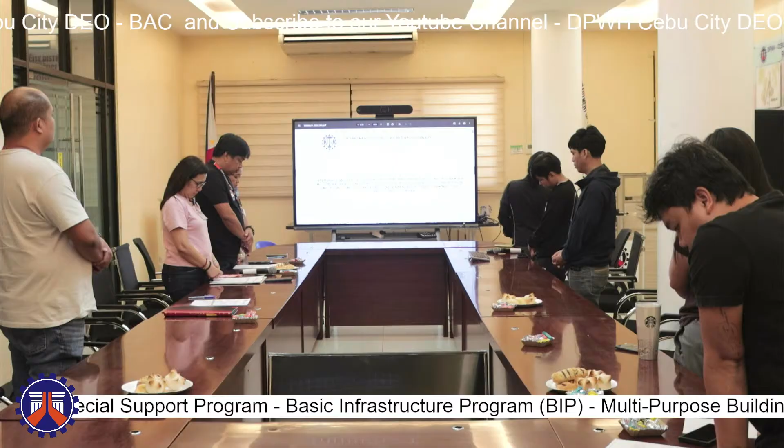Let us put ourselves in the presence of the Lord. Our Heavenly Father, we offer you our thanksgiving. We thank you for everyone gathered here today to walk with you. May we ask for your blessings and guidance so the activities set for this undertaking be successful. We ask you to open our eyes to see the wonderful things from this activity, open our ears so we may retain the invaluable knowledge, open our minds for us to think wisely, and fill us with understanding, cooperation, and peace in fulfilling our responsibilities. Open our hearts so we may receive your everlasting love, and open our spirit so we may know that you are with us all throughout the day. We ask all this in the name of Jesus Christ. Amen.

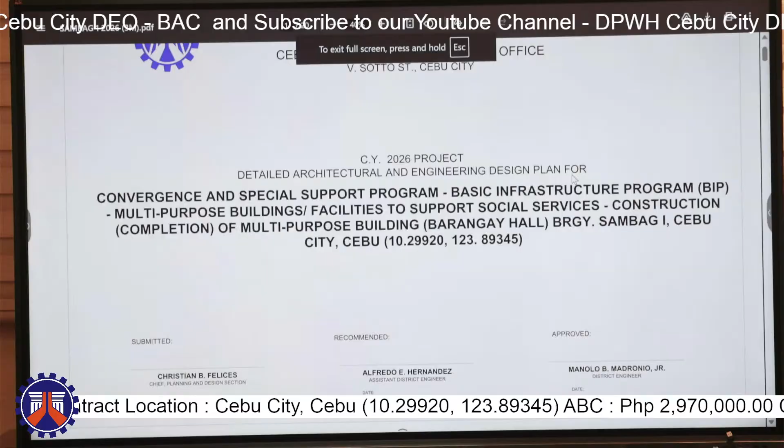The approved budget for the contract is 2,970,000. Here is the site development plan and vicinity map, its perspective and its geotagged photo, and the summary of quantities.

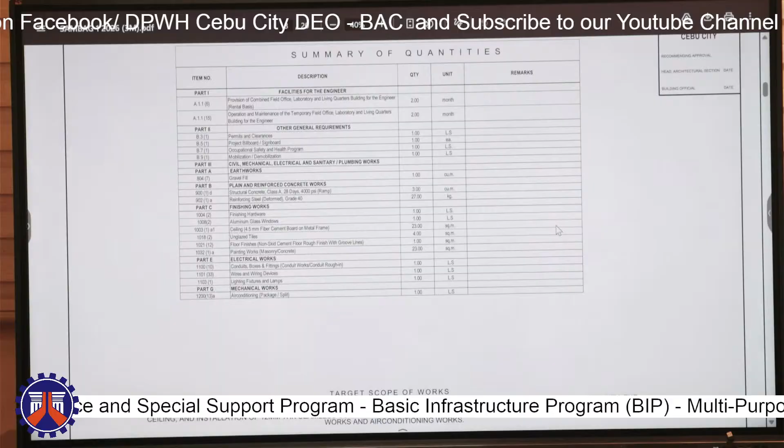The scope includes earthworks, plain and reinforced concrete works for ramp construction, finishing works at the roof deck, ceiling installation at the third floor, floor finishes for the ramp, and installation of electrical and air conditioning units. Here is the ground floor plan.

Here is the installation of the ramp with floor finishes — non-skid cement floor finish with groove lines and unglazed tiles. This is the second floor plan, and the third floor plan shows the removal and replacement of ceiling and also electrical works.

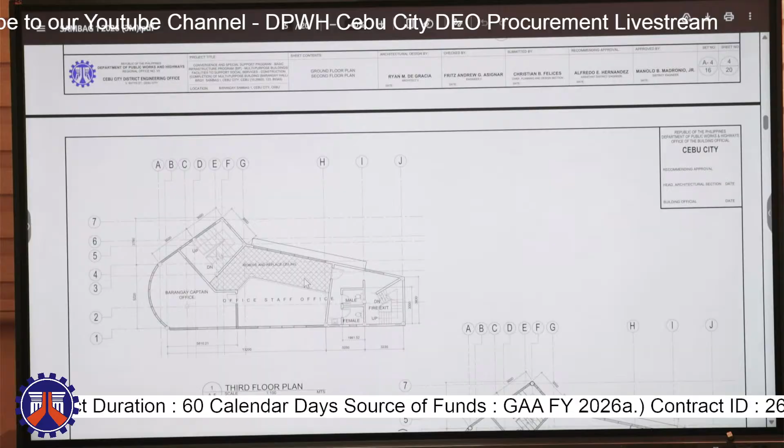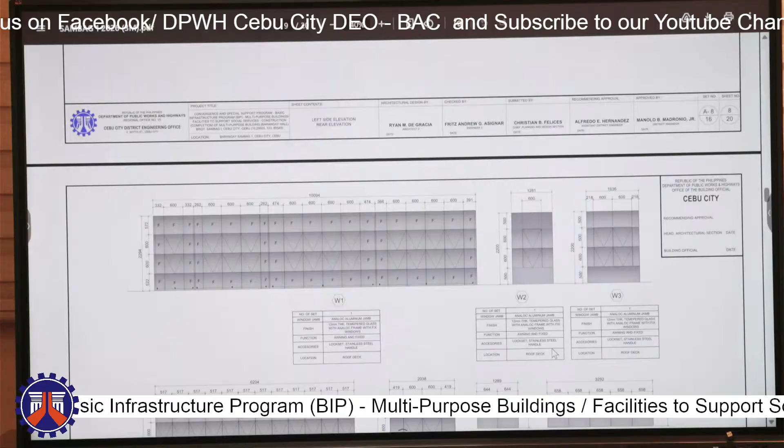In the roof deck plan, we close all the area with curtain walls and 12mm thick awning windows. Here are the different schedules, the detailed ramp plan, and ceiling plan. And that's all.

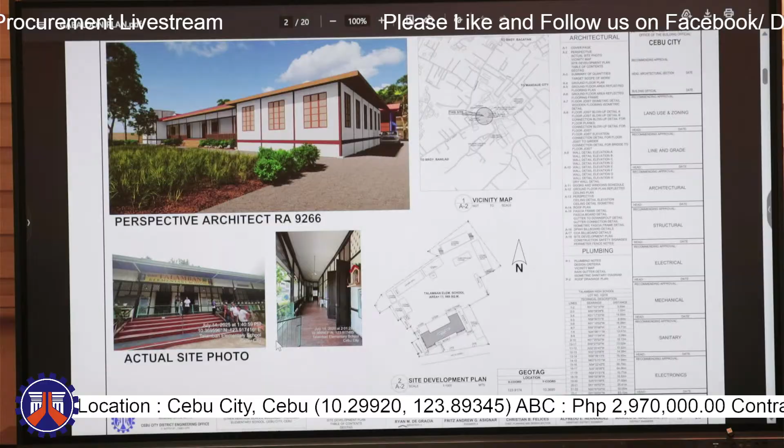Here is its perspective, vicinity map, and site development plan with geotags, and the summary of quantities. This project aims to restore and conserve the Talamban Elementary School Gabaldon building in Cebu City.

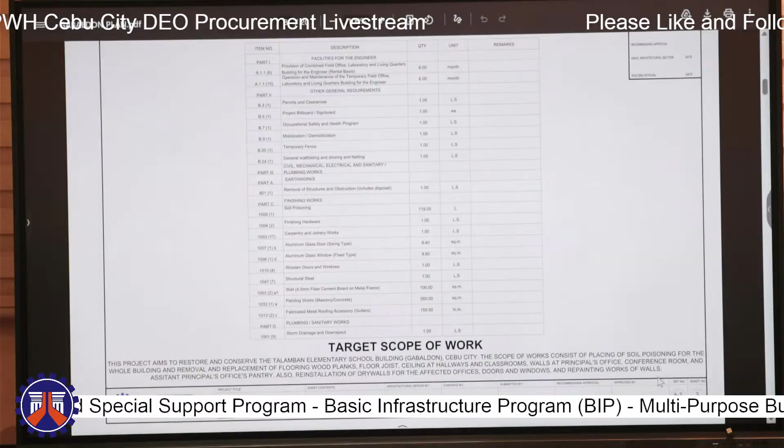The scope of work consists of placing soil poisoning for the whole building, and the removal and replacement of flooring, wood planks, floor joists, ceiling at hallways and classrooms, walls at the principal's office, conference room, assistant principal's office, and pantry area. Also reinstallation of drywalls for the affected offices, doors, and windows, and repainting of woods and painting works of walls.

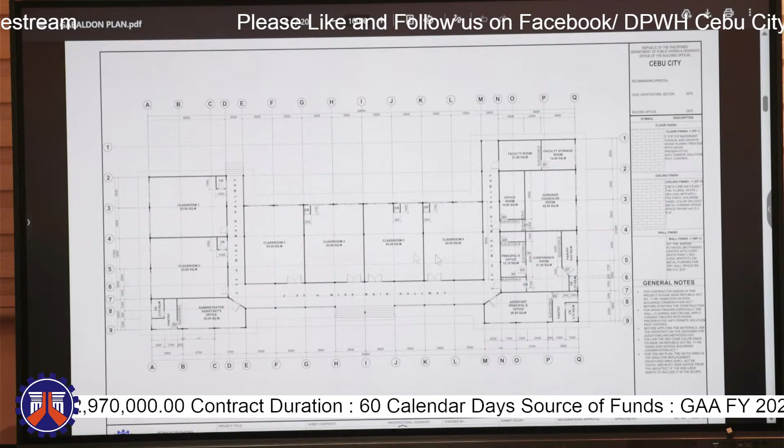Here is the ground floor plan. All areas will be placed with soil poisoning, and each floor joist and flooring plank is removed and replaced. Here is the ceiling flooring plan.

The detailed floor joist and flooring details, blow up detail of floor joist and connection of wooden floor planks.

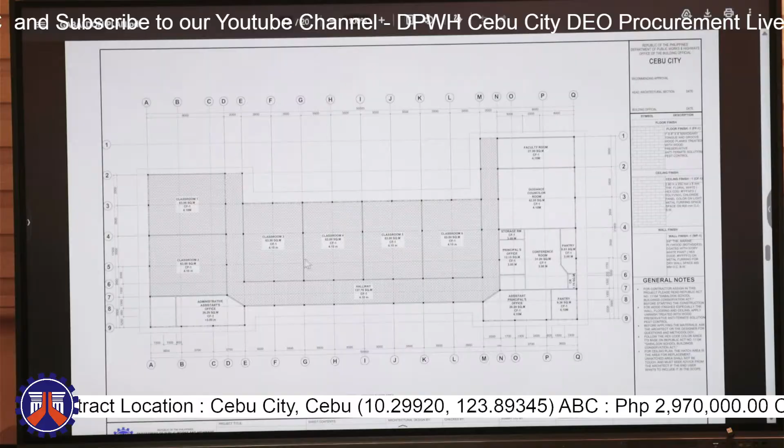Removal of dry walls at the affected offices, schedule of doors and windows, and removal of all 6 classrooms and hallway ceiling.

Here is the ceiling detail.

Removal of gutter and reinstallation of downspout. Removal and replacement of gutter and installation of downspouts. Fascia framing detail and gutter connection detail and downspout.

Isometric sanitary diagram of all downspouts. And that's all.

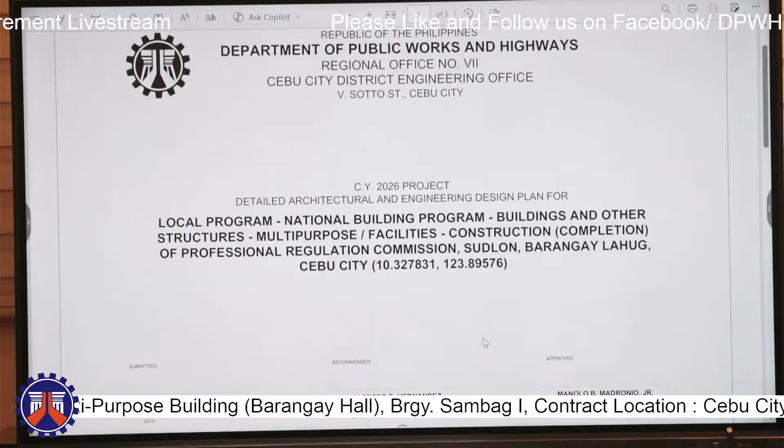For the next project, contract ID is 26HH0021 with contract name Local Program, National Building Program, Buildings and Other Structures, Multipurpose Facilities, construction completion of Professional Regulation Commission, Sudlon.

Barangay Lahug, Cebu City, with the approved budget contract of 29,400,000 and with its contract duration of 240 calendar days. Source of fund is GAA FY 2026.

So this is the perspective view, the vicinity map, and the site development plan.

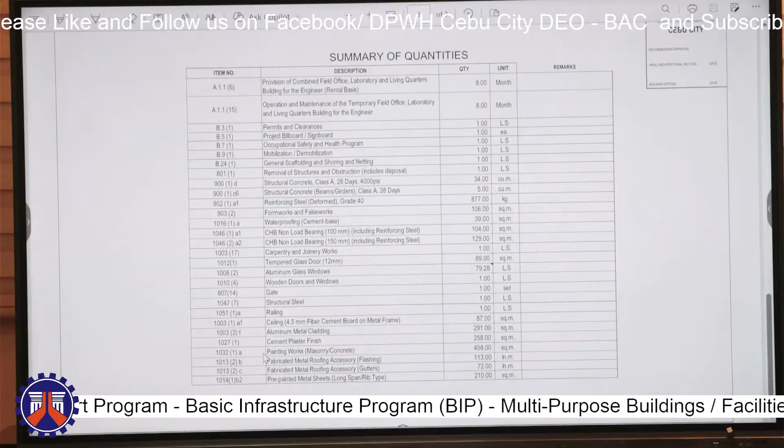For the summary of quantities, there will be structural concrete for beams and girders for the mezzanine area.

Waterproofing also, and installation of CHB non-load bearing, carpentry works, tempered glass doors and windows, and wooden doors.

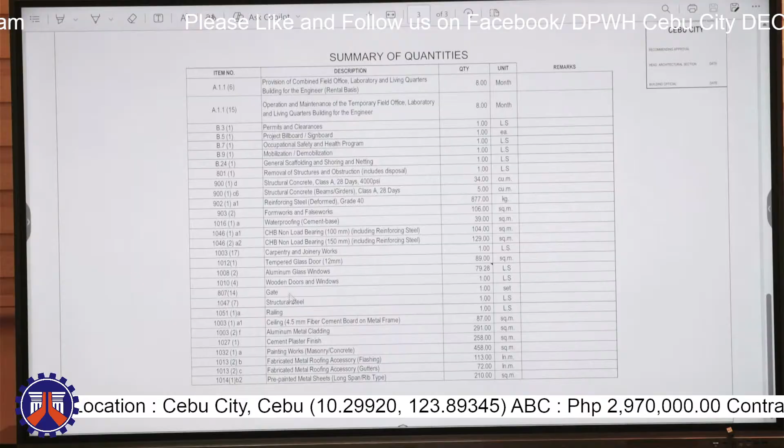As well, installation of wooden doors, and then installation of gate, the perimeter side sa tubangan, and then structural steel, railings at the ramp.

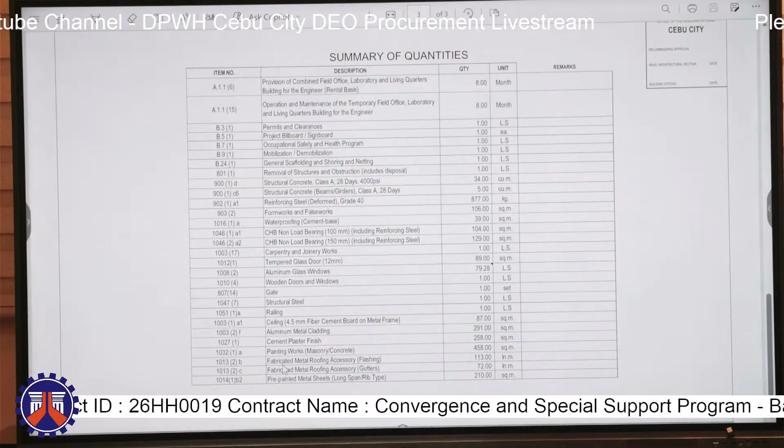Installation of ceiling, installation of aluminum metal cladding, cement plaster finish, and painting works for masonry, and then removal and replacement of metal roofing accessories, flashing, gutters, and rib type metal sheet, long span.

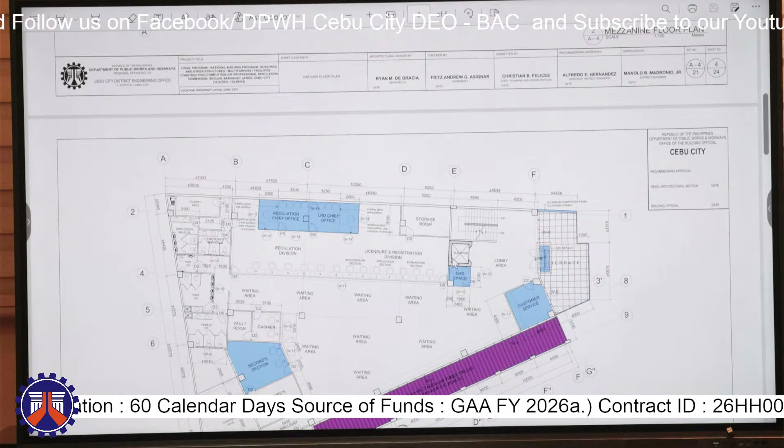The second floor, the tube trellis will be installed in this side, and then extension of the LRD chief office.

So the existing glass wall partition will be extended in this part, and then there will be a new additional glass wall partition, and at the records section as well, window and doors.

Installation, and the GAD office, window and doors installation, and the customer service room as well.

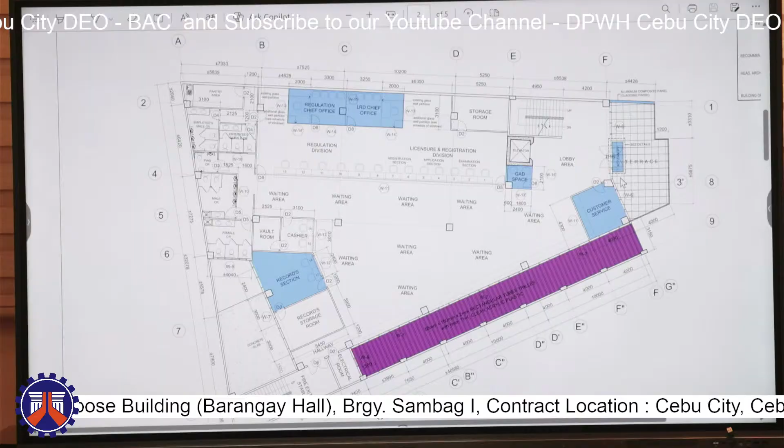For the canopy, there will be an installation of ACP canopy and this side of the building as well.

Installation of aluminum composite panel or cladding finish at the terrace.

So the same at the third floor, the cladding finish extends to the third floor.

And then so for fourth floor, steel stairs will be installed going to the roof deck.

Trellis again with acrylic roofing will be installed in this area at the back.

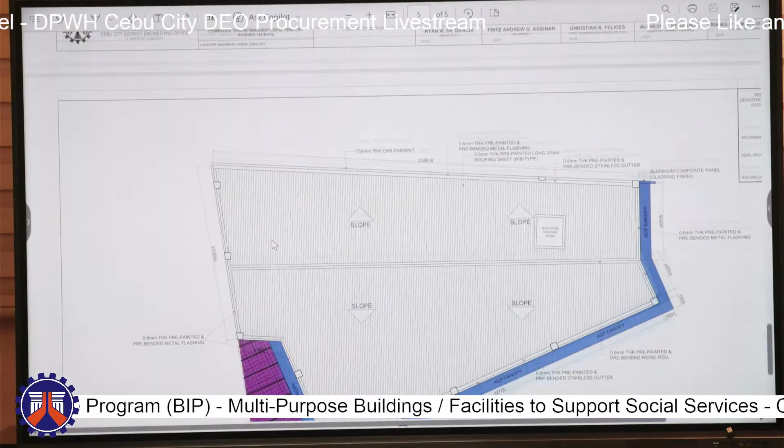So this is the roof plan. Canopy will be installed with a cladding finish on this side, rear, left, and front.

And there will be removal and replacement of gutters and flashing and long span roofing sheet rib type as well.

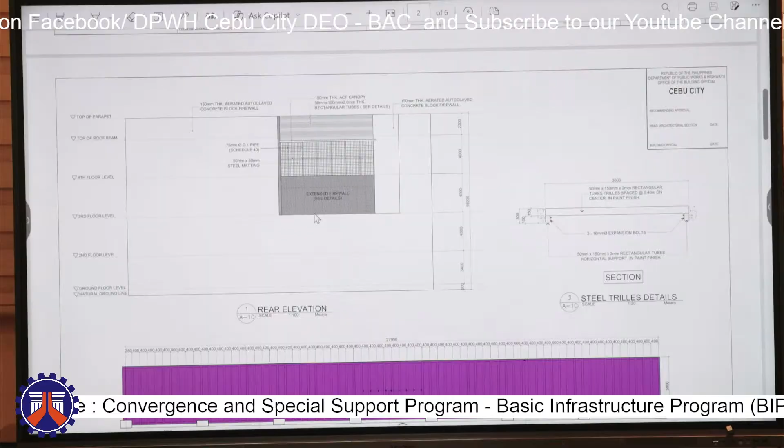And then the extended firewall at the rear elevation, at the rear side. So, extend by 4 meters.

And then this is the detail of the steel trellis.

So the extension of the wall parapet, roof beam.

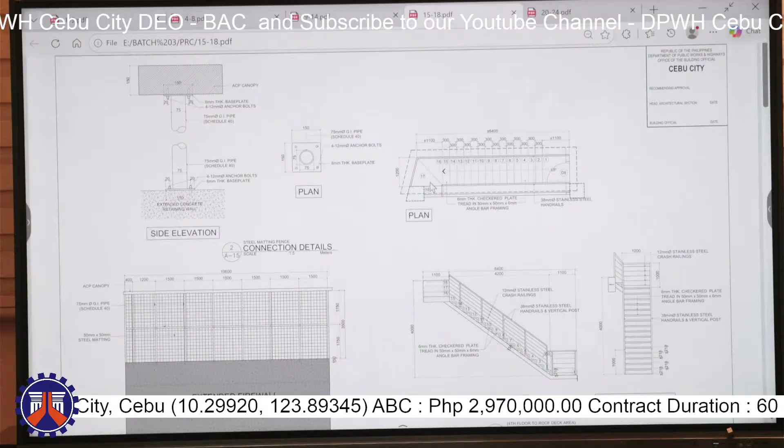So the steel staircase at the fourth floor to roof deck details.

So this is the structural details of that parapet extension. Existing from the third floor to fourth floor extension. That's all for PRC.

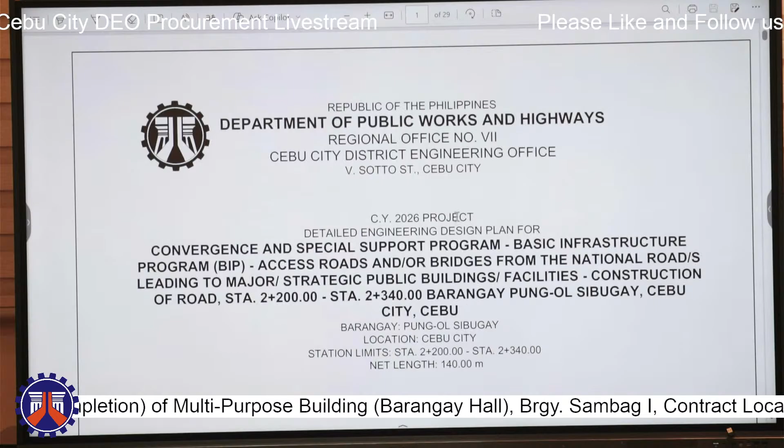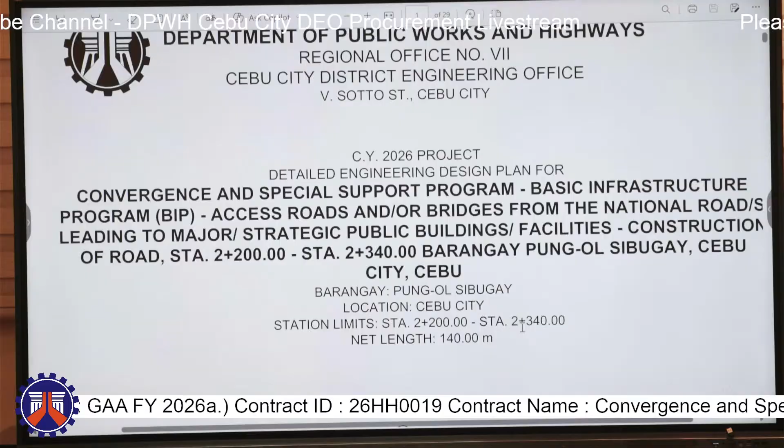For the next project with the contract ID 26HH0022, Convergence and Special Support Program, Basic Infrastructure Program, BIP, access roads and or bridges from the national roads, leading to major strategic public buildings facilities, construction of road, station 2,200 to 2,340, Barangay Pung-ol Sibugay, Cebu City, Cebu. Its station limits are from station 2,200 to 2,340, having a net length of 140 meters.

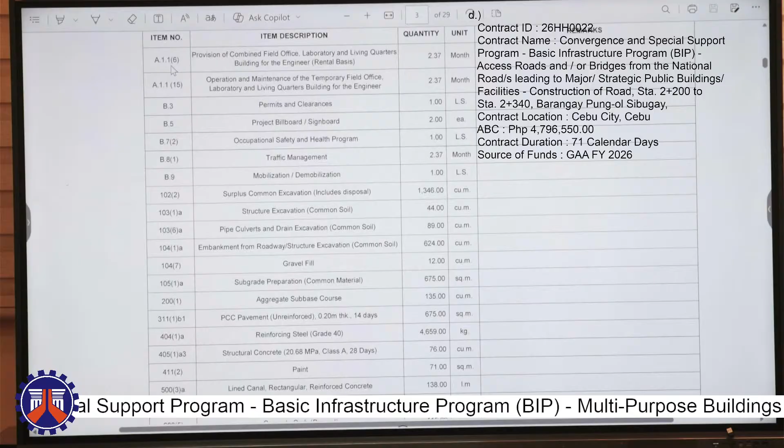For the summary of quantities, we have the usual quantities, and then we have surplus common excavation, structure excavation, pipe culverts and drain excavation, embankment excavation, gravel fill, subgrade preparation, aggregate subbase course, PCCP 14 days 200 thick, and reinforcing steel and structural concrete, paint, lined canal, stone masonry, and concrete curb precast.

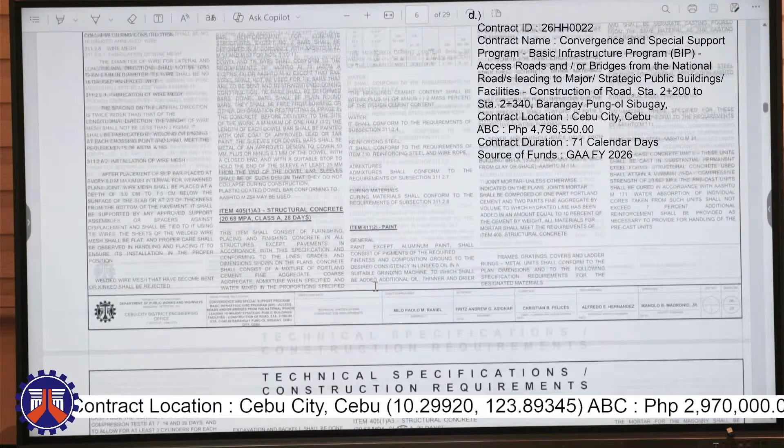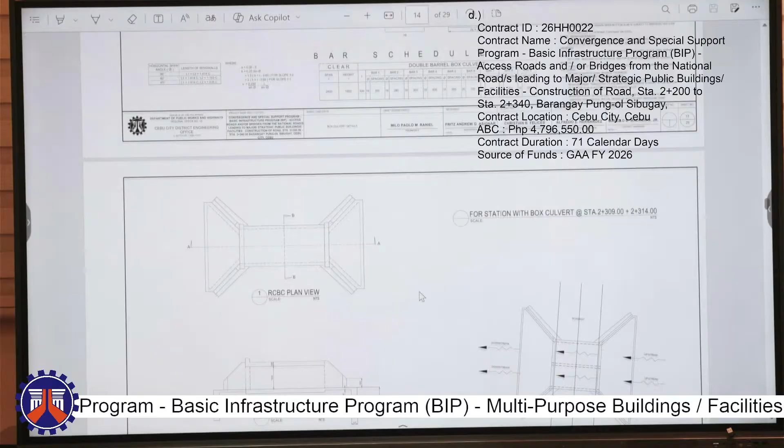And then here is the schedule of structures, and then the details for the stone masonry, the typical line canal, and then the sections for the project. That's all for this project.

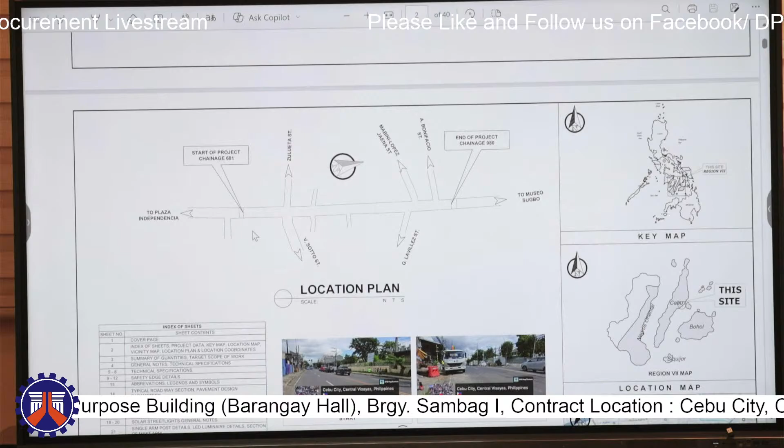Our project is located near COA Regional Office along MJ Cuenco Avenue. Our start here is after the Tabacalera Bridge going to Tejero Bridge.

This is sample photos, site photos for start and the end station. We have our coordinates, start and end also. Then our vicinity map here. You can clearly see the project.

Next, our summary of quantities. We have, for our main scope of work, removal of ACP since this is asphalt overlay. We also have removal of structures for the sidewalk and removal of curb and gutter.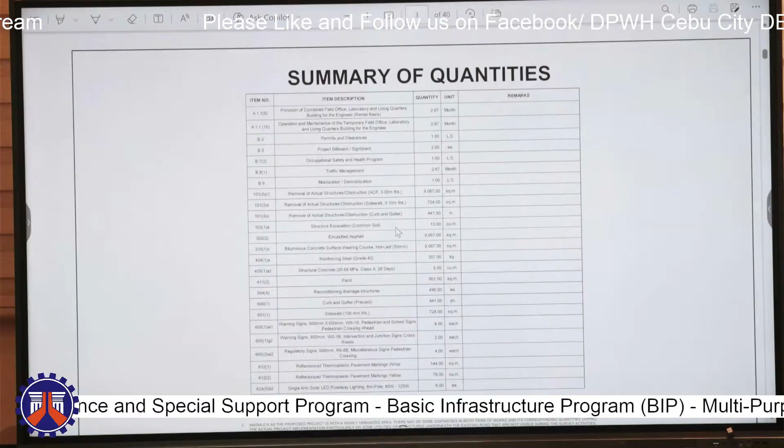For the structure excavation, this is for the solar street lights. Emulsified asphalt and bituminous concrete surface wearing course hot laid is for our asphalt overlay. Reinforcing steel grade 40 and structural concrete is also for the pedestal of our solar street lights.

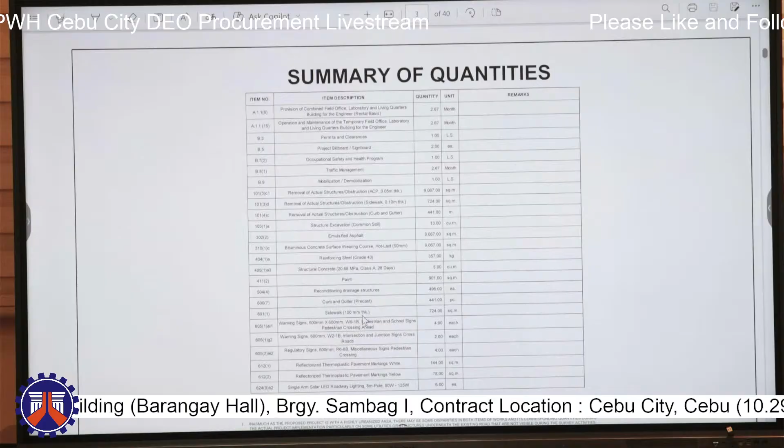Paint is for the concrete curb and sidewalk. Then we also have reconditioning of drainage structure. Then concrete curb precast since we have to replace the existing and also the sidewalk. Then we also have our warning signs.

This one is for a pedestrian crossing ahead. Next is the intersection and junction sign. Then next one, the first one is the warning sign. This one is the regulatory sign, pedestrian crossing.

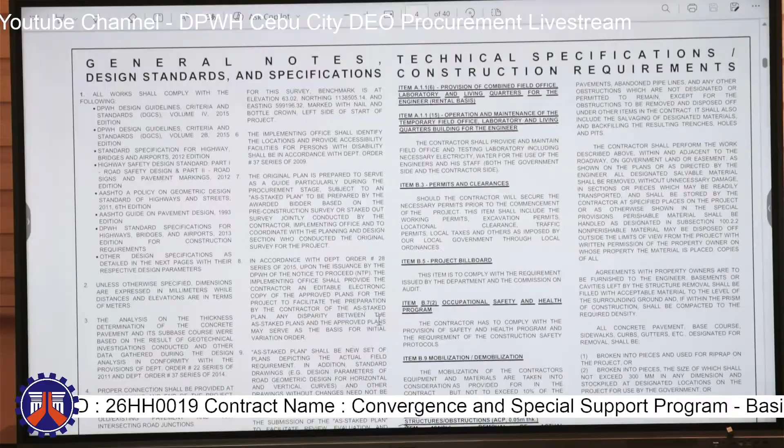Then we also have thermoplastic pavement markings, white and yellow. And also the last one, we have our solar street lights. Here we have our general notes and technical specifications of the items involved in this project for your reference.

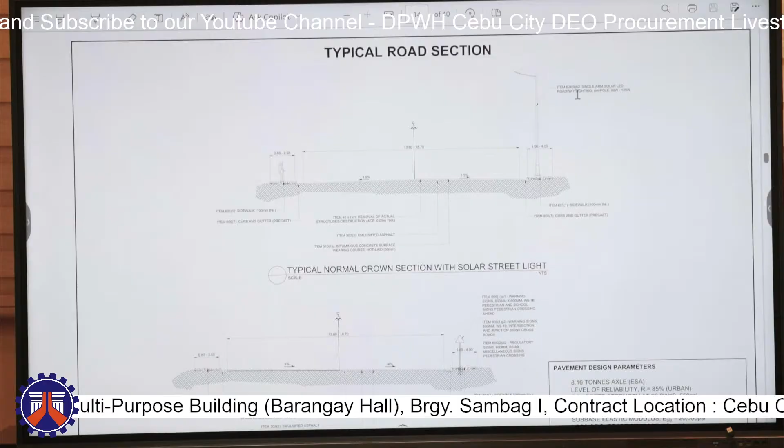Here we have our main road. Then we have our sidewalk here, both sides. Then we have our solar street lights at the right side. Then we also have our typical super elevated section with road sign, this one.

And then the next pages are typical pavement markings. Then we have our pavement marking plan here. Start of our project, the Tabacalera Bridge, going to Tejero Bridge. This one is junction of Bisoto.

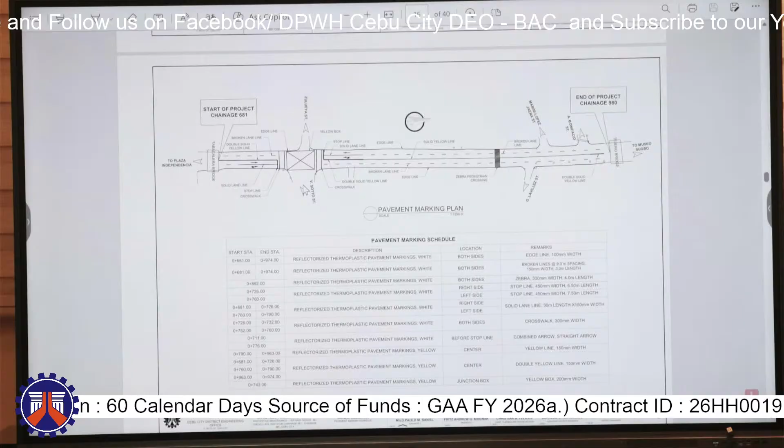The layout of our solar street lights. We have a spacing of 25 meters and staggered placement.

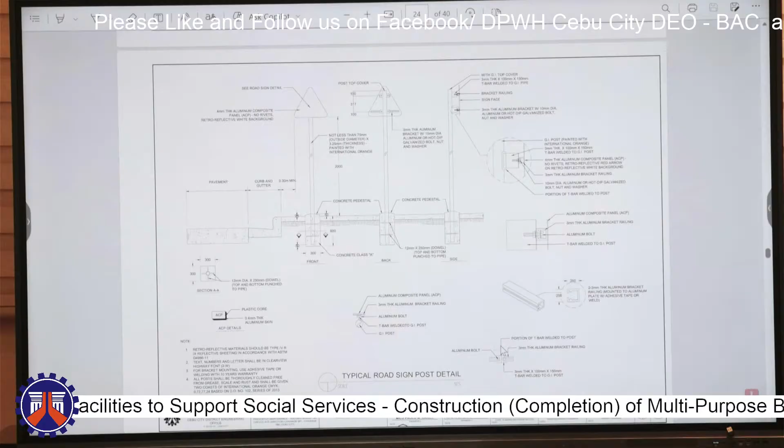Next is the typical road sign detail, this one. Then our road sign detail with the corresponding chainage. This one for our schedule of structures. Next is the super elevation detail.

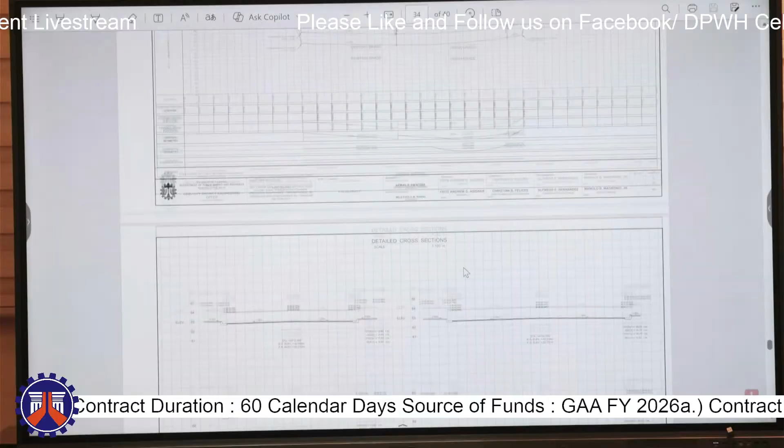Then we also have our billboard design, this one, our new billboard design. Then the plan profile for this project, then the detailed cross section, and the last one is our detailed quantity calculations. That's all for this project.

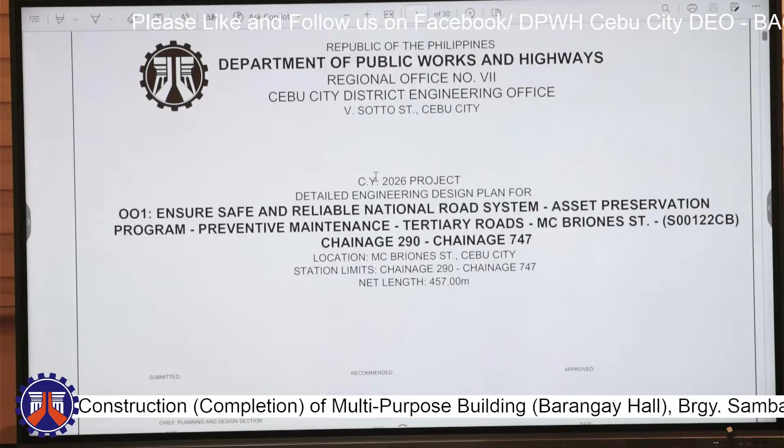So our next project with the contract ID of 26HH0024, with the project name: Ensure Safe and Reliable National Road System Asset Preservation Program, Preventive Maintenance, Tertiary Roads, MC Briones Street, Section ID 122CB, Chainage 290 to Chainage 747, Cebu City.

Contract location: Cebu City. Description: roads construction, asphalt, with approved budget for the contract of 34,114,780 pesos only, and contract duration of 88 calendar days. Source of fund: GAA FY 2026. We have a net length of 457 meters.

So this is the location of the project, near the City Hall. Then for the summary of quantities, we have removal of asphalt, ACP.

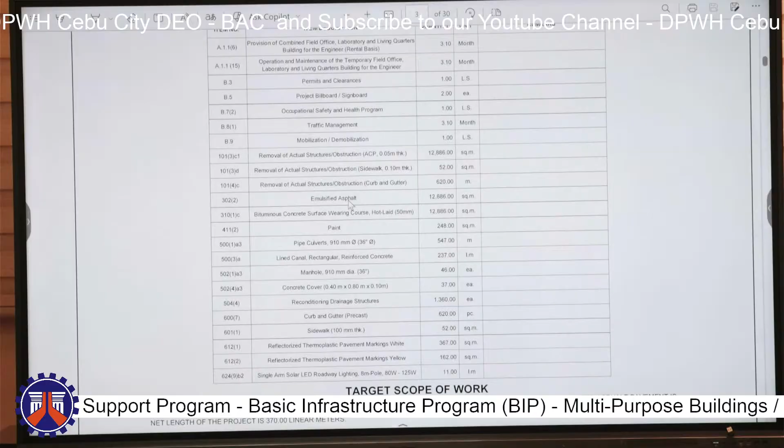0.05 meters thick, removal of actual structures obstruction sidewalk 0.10 meters thick, removal of curb and gutter. So for the asphalt, we have emulsified asphalt, bituminous concrete surface wearing course hot laid 50 mm, paint, and for the drainage structures, we have pipe culverts, lined canal, manhole, concrete cover.

We also have reconditioning of drainage structures. For the replacement, we have curb and gutter, sidewalk, and thermoplastic pavement markings white and yellow. Lastly, we have single arm solar LED roadway lighting, 8-meter pole, 80 watts to 125 watts.

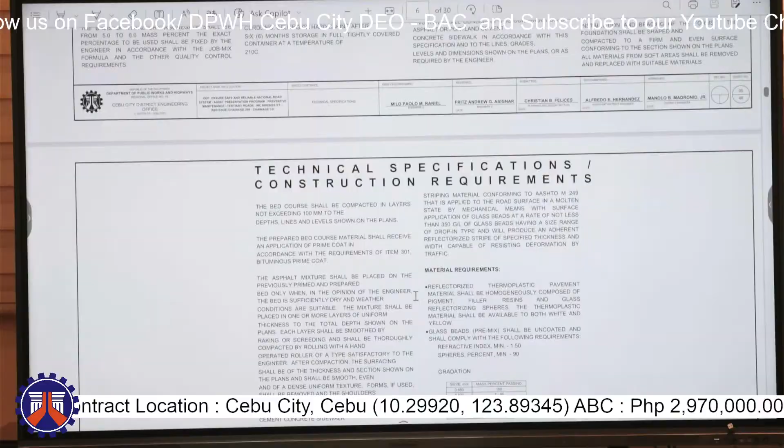Good afternoon. I'm about to discuss the project with the contract ID of 26HH0025, which is the Convergence and Special Support Programs, Sustainable Infrastructure Projects, Alleviating Gaps (SIPAG), access roads and or bridges

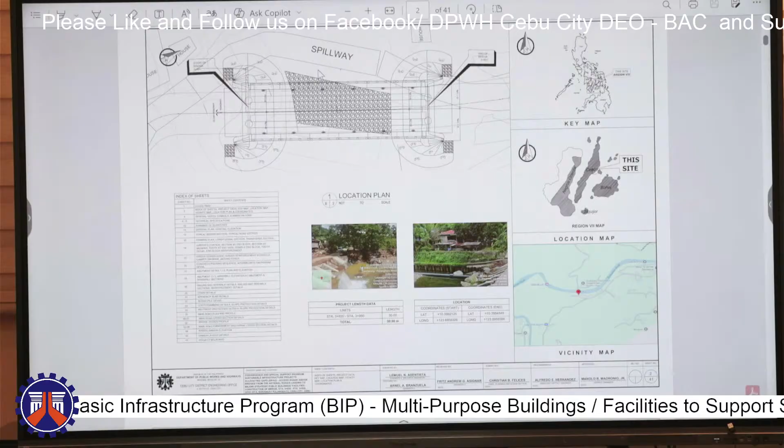The Bridge of Dita is located beside the spillway of Barangay Pulangbato. It traverses to Barangay Sirao. From the Pulangbato side, it diverges from the road to the spillway, and converges to the road after the spillway going to Sirao side.

So here is the general notes and the specifications. Here is the general plan and general elevation with the item number applications wherein stated.

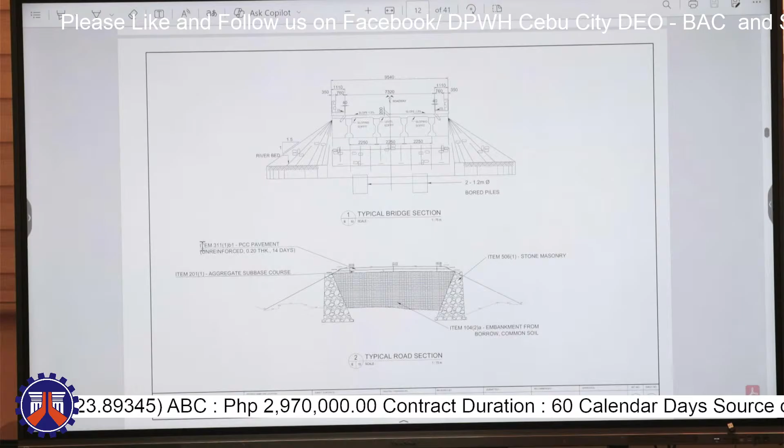Here we have the typical bridge section, the typical road sections, where the application of PCCP and then stone masonry, embankment, and aggregate sub-base course are also stated. We have the framing plan and also the sections, the longitudinal plan also.

It is a pre-stressed concrete girder kind of bridge deck with the length of 30 meters and the width of 9.54 meters. Here we have the girder design guide along with its strength for jacking force.

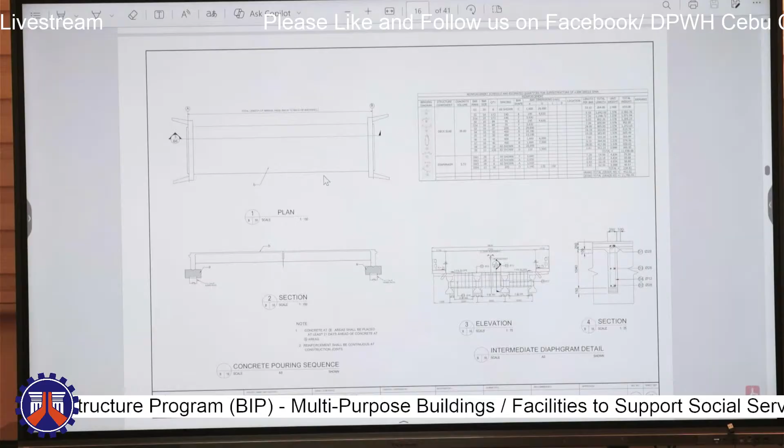We also have the plan section and the details also for the quantity of this superstructure. We have also for the abutment design and details sections.

Also for the wing walls and other designs of the abutment with the abutment quantity takeoff. Here we have the sidewalk elevation, plans, and sections, with also for its estimate.

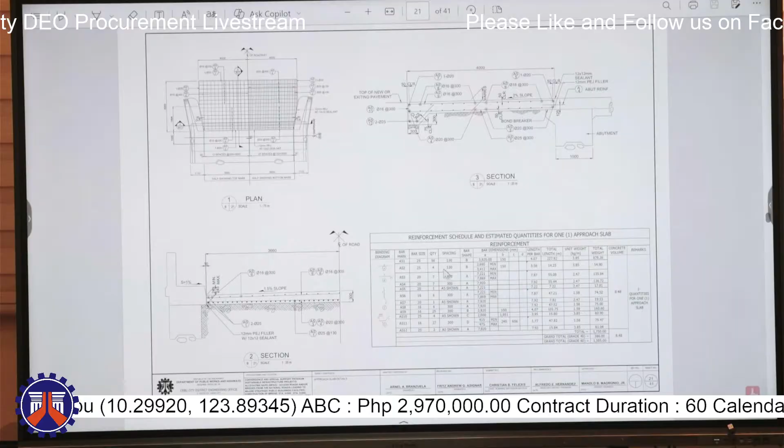Here we have the sidewalk detail and the abutment plan and sections with its quantity. Here we have the bored pile details.

Here we have also the typical detail for coffer dam and the reinforced concrete with slope protection and with the sheet pile detail.

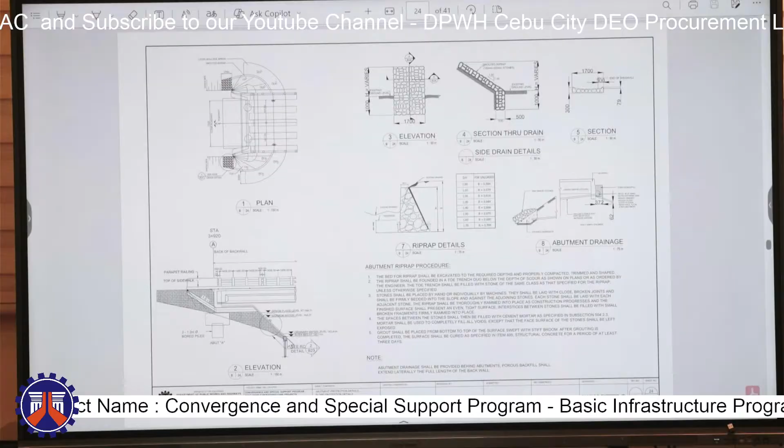Here we have the abutment details with the riprap procedure notes stated also with the proper elevation and placing of the reinforced concrete.

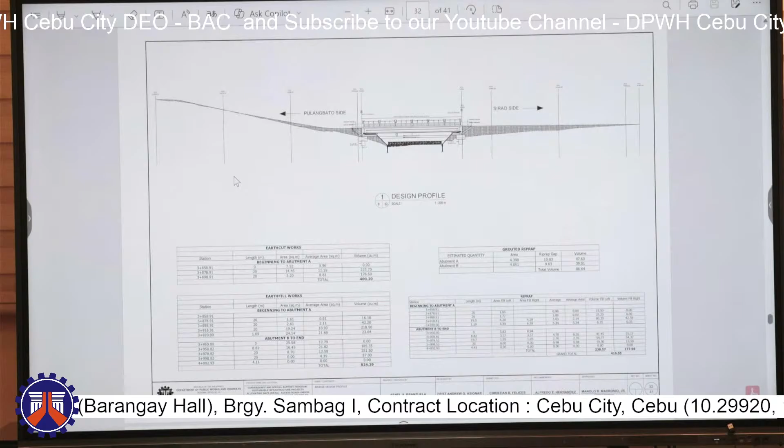Also here we have the design profile for the embankment where the PCCP is going to be placed also beforehand. We have also here the quantities that has been calculated for the embankment and the stone masonry that is to be applied.

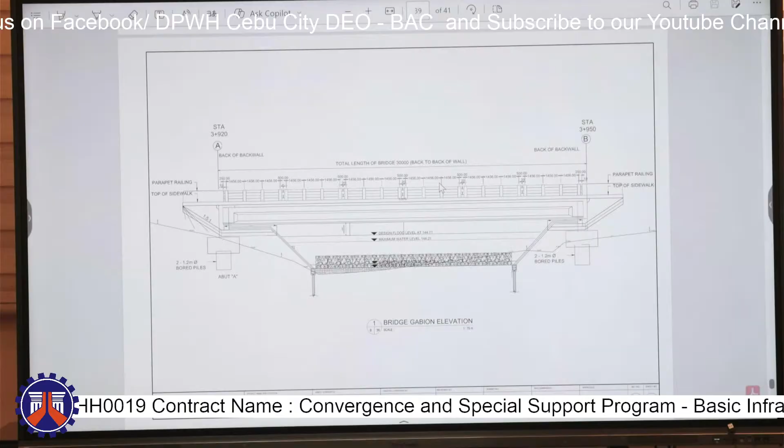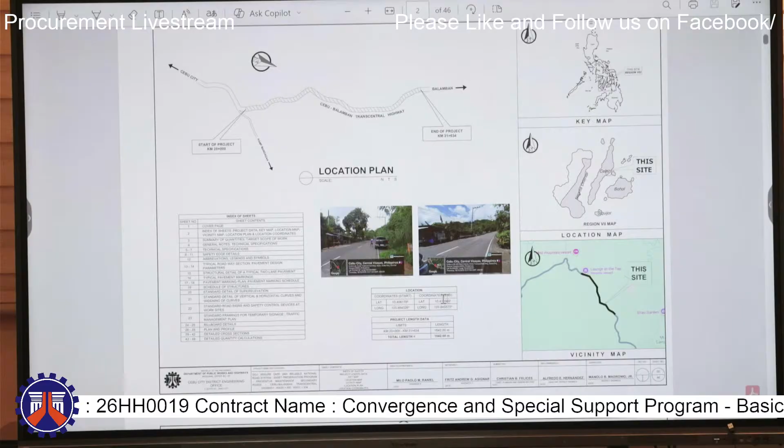Here we have our station limits. Starts from kilometer 20 to kilometer 21 plus 673 with a net length of 1,642 meters. Our location plan, this one starts from kilometer 20. This project is along Cebu Balamban Transcentral Highway. We have our site photos, start and end, our coordinates for the start and end also, and our vicinity map here.

Next are summary of quantities. For our major scope of works, we have removal of structures, ACP, since this is asphalt overlay. Surplus common excavation is for the shouldering. We have some parts of the road that need shouldering. This one, subgrade preparation, aggregate sub-base course, emulsified asphalt and bituminous concrete for the asphalt overlay.

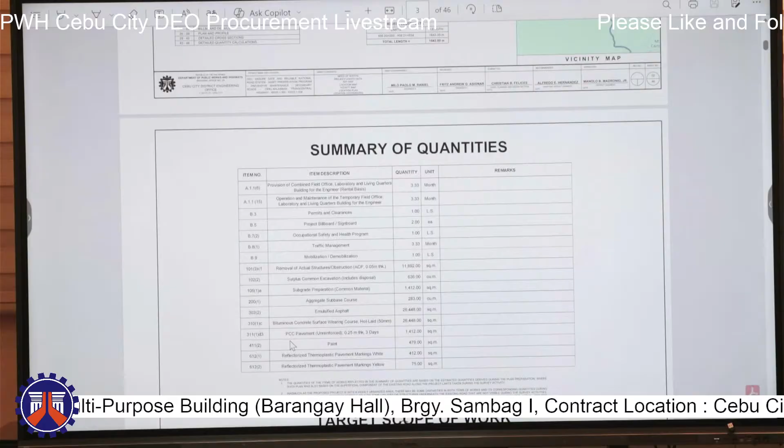Next one is the PCC pavement, 0.23 meter thick, 3 days. We also have paint for the curb. And next one is pavement markings, white and yellow.

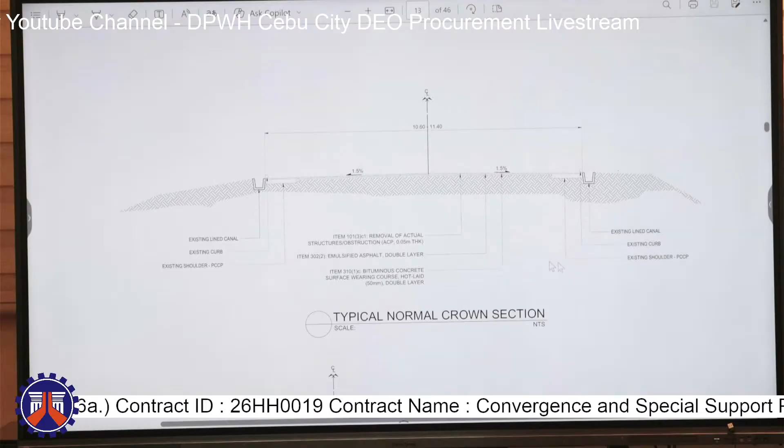Our general notes and technical specifications involved in this project. Next, we have our safety edge details for the asphalt. Then our symbols and legends. Then we have our typical road section, this one. This one is for normal crown section. Since we have our existing PCCP here, we just have to overlay it with asphalt, this one.

And next is super elevated section, also with the existing PCCP pavement. Then this one, we have the shouldering, both sides, only concreting on this part.

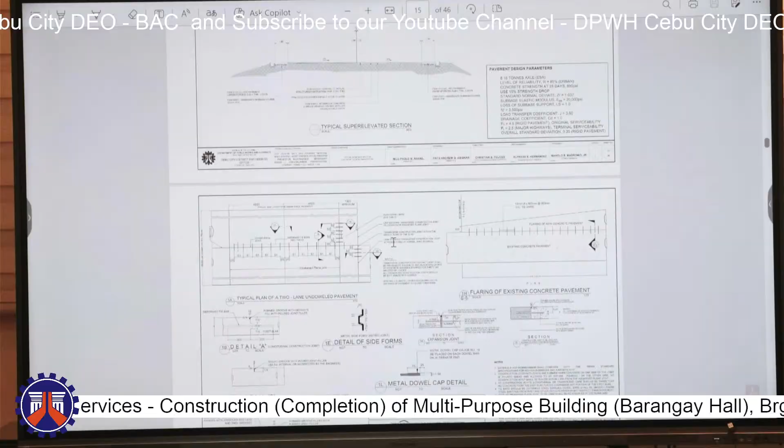Next, we have structural details, the pavement marking, typical pavement marking details. Then also our pavement marking plan here, with the pavement marking schedule also. This one. Then our schedule of structures for your reference. Super elevation details, then the horizontal and vertical curve details. And next, our billboard details also.

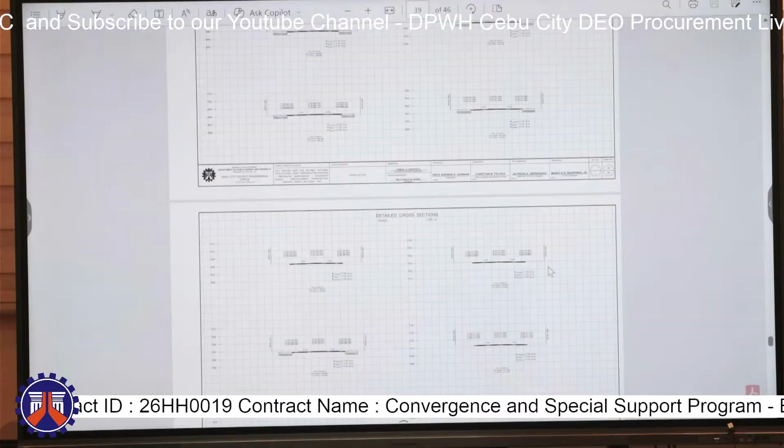We have this one. Then our plan and profile. This one. Then next is the detailed cross section. And lastly, our detailed quantity calculations. That's all for this project.

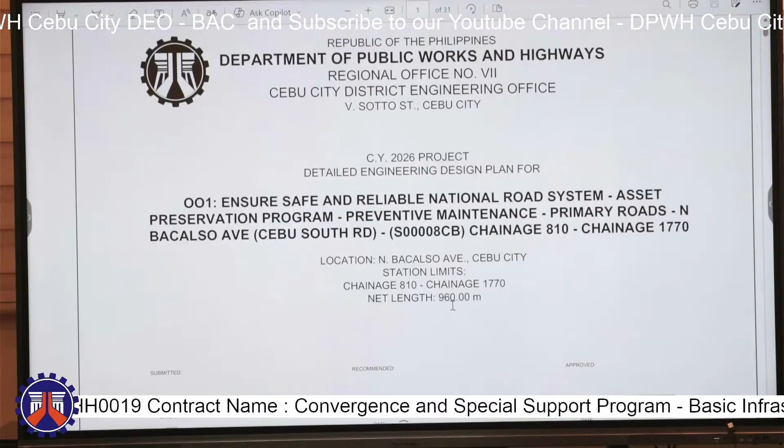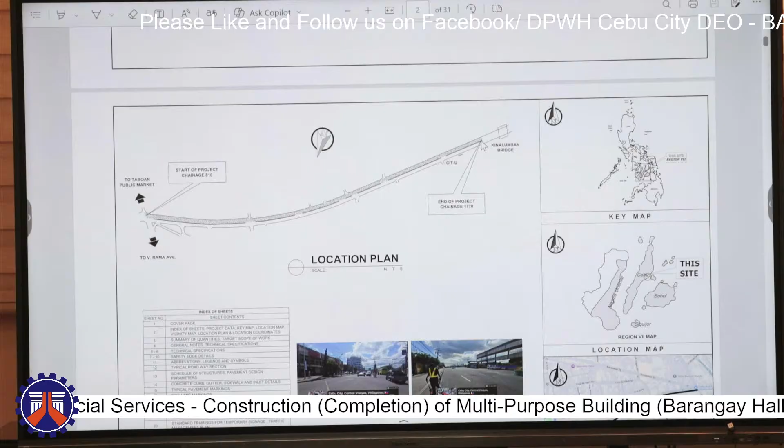So we have here our location plan for the project. For everyone's information, this starts on the junction of V. Rama, and it is only on the left side, which is the northbound side, Satoang N. Bacalso.

And it ends along the end of the island, unahan sa CIT University. So here is our vicinity map for our guidance for its location, as well as the pictures for the start and end of the project, as well as the coordinates and the length of the project.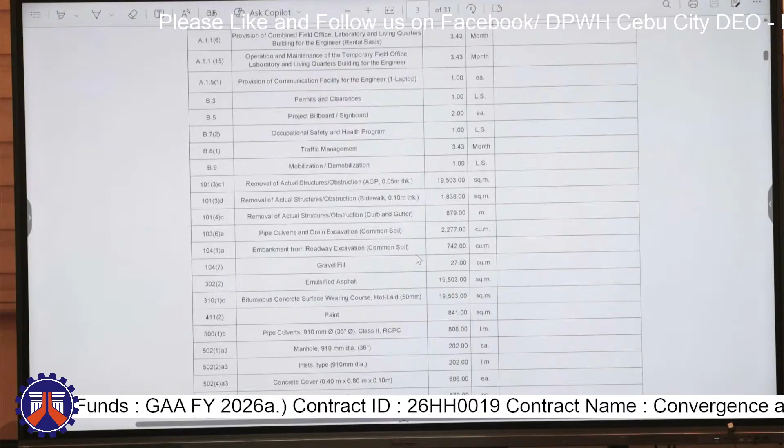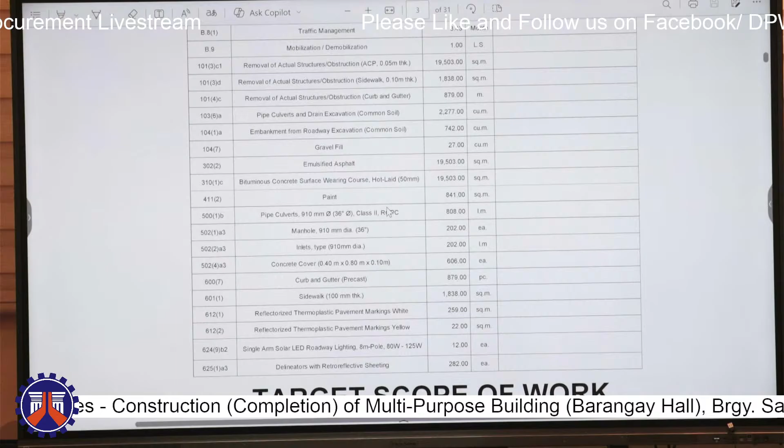Also have the removal of sidewalk, curb, gutter, and we also have pipe culverts and drain excavation for our drainage, as well as embankment, gravel fill, and for the main scope of work, which is emulsified asphalt and bituminous concrete surface wearing course. This is double A, by the way, and paint for our curb, then pipe culvert of 910 millimeter in size, as well as manholes, inlets, concrete covers, then the curb and gutter as well as sidewalk for the replacement of the ones we removed.

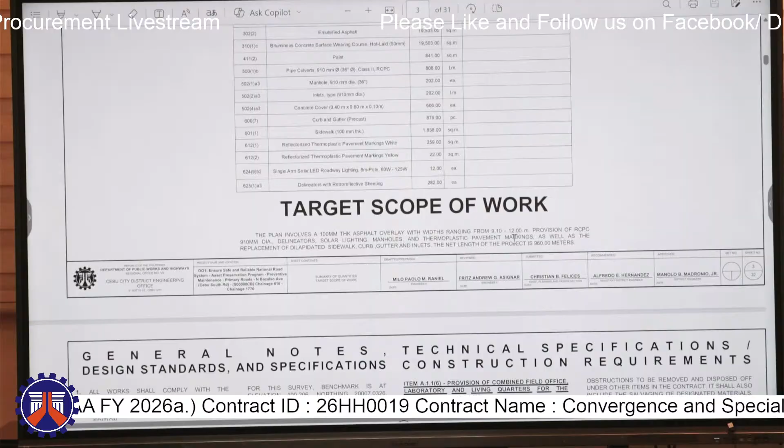And we also provided pavement markings, both white and yellow, as well as single arm solar LED roadway lighting and delineators, which will be placed on the islands. So for the target scope of work, this is a 100 millimeter thick asphalt overlay with widths ranging from 9.1 to 12 meters, as well as the provision of RCPC, solar lighting, manholes, pavement markings, etc. And the total length of the project is 960 meters.

So we have here the general notes as well as the technical specifications included for this project. Here's the general notes for our asphalt overlay.

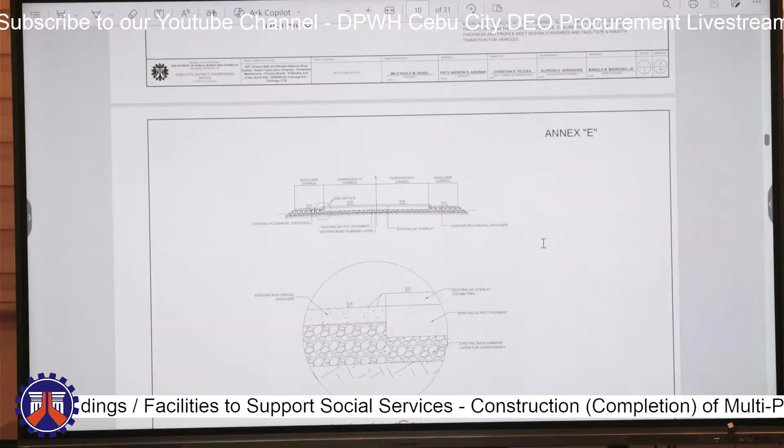Then the legends and symbols. And here's the typical roadway section.

Basically here, I'm just showing the typical road section of Bacalso, but essentially we will only be working on this side of the road since the project only includes this side, which is the northbound side of Bacalso.

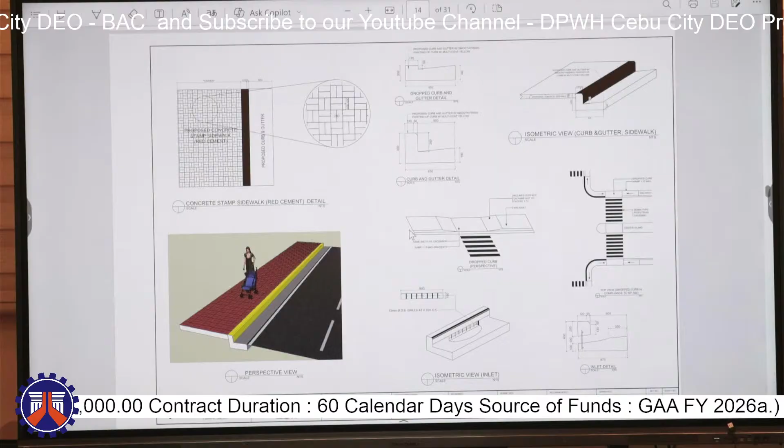Here is the schedule of structures, as well as the typical for our curb, gutter, inlet, and sidewalk. Then the thermoplastic pavement markings and the specifications for our delineators to be placed on the islands. Then here are the notes for our solar LED lighting.

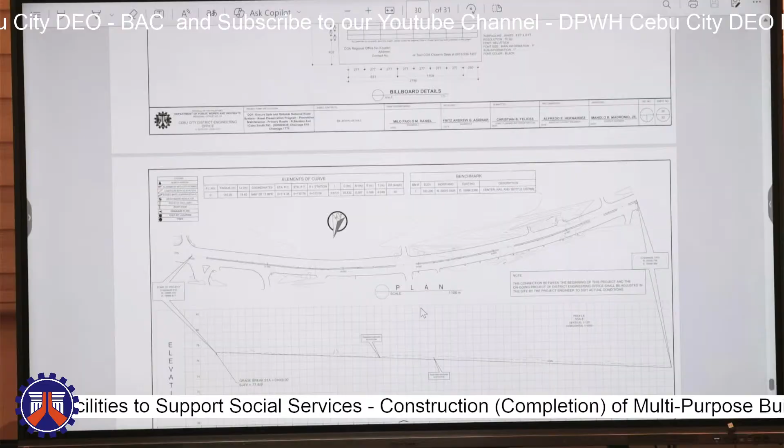Then the specifications for RCPC, as well as the manholes and the super elevation with the vertical and horizontal curves, as well as the traffic management plan, the billboards, and our profile for the project. That is all.